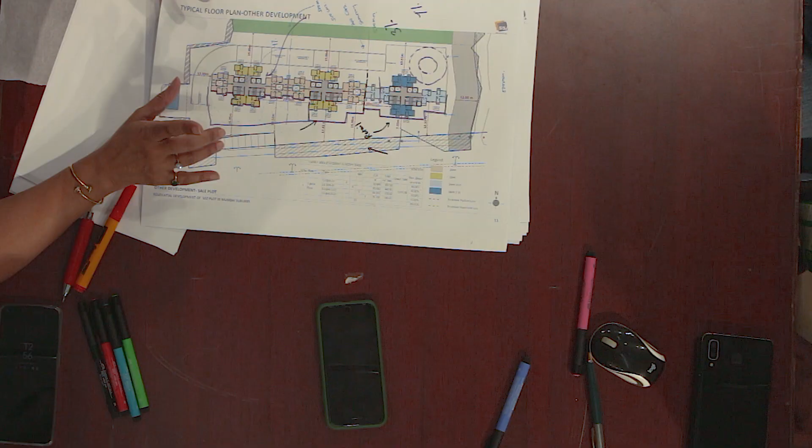So we had a quick meeting with the deadlines you have told us. With those deadlines, we had a discussion where we discussed exclusively what structural scheme we can go ahead with, and Girish has come up with brilliant schemes. So we'll discuss that today.

Sure. And Rohit also discussed all his MEP services, and I find that this fungible, which I had restricted to 1% and you told me I can go up to 2.5%, I may have to go up to 3%, but wherever it is possible, I'll try to restrict it. Try to limit it to 2.5 to the extent possible.

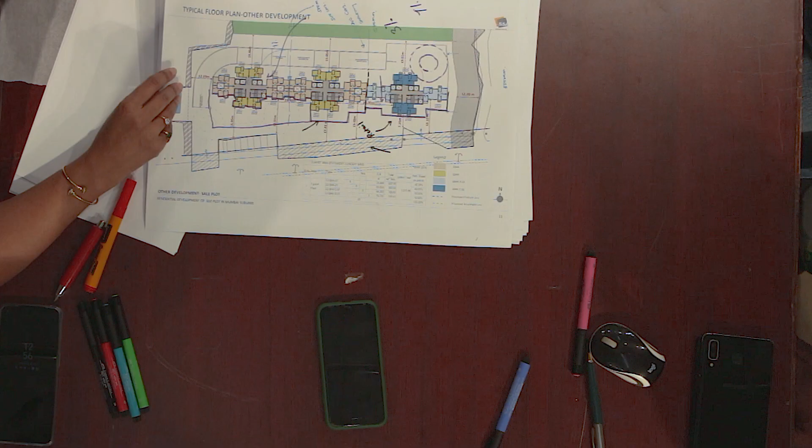Okay, again, we discussed extension of the podium, which you gave me as an option. So Girish again has a very good solution there. So let's understand from Girish and Rohit what exactly we are going to work with on the MEP and structural part of it, and let's conclude that today. Okay. So I'll start first because it deals with some tweaking in the master plan.

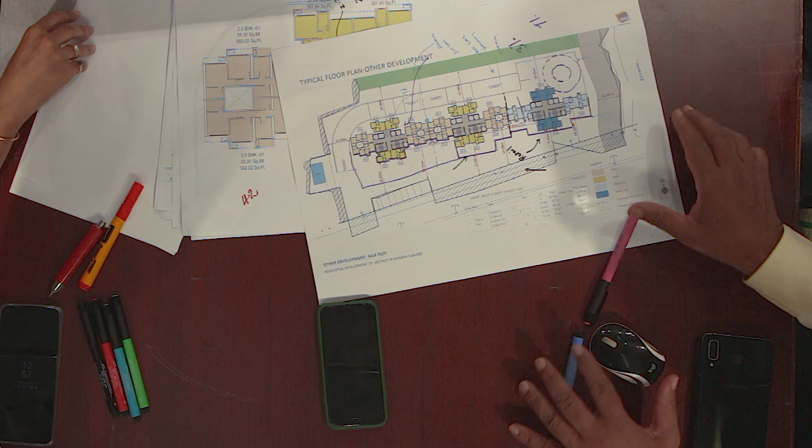I gave the values of the separation joints as 500 millimeters between two blocks, because they should not pound on each other in earthquake and wind. In the superstructure only. In fact, I had told the team last time that I would ensure I would not provide that joint in podium and basements, which I have succeeded in achieving. So the separation will start at the podium level.

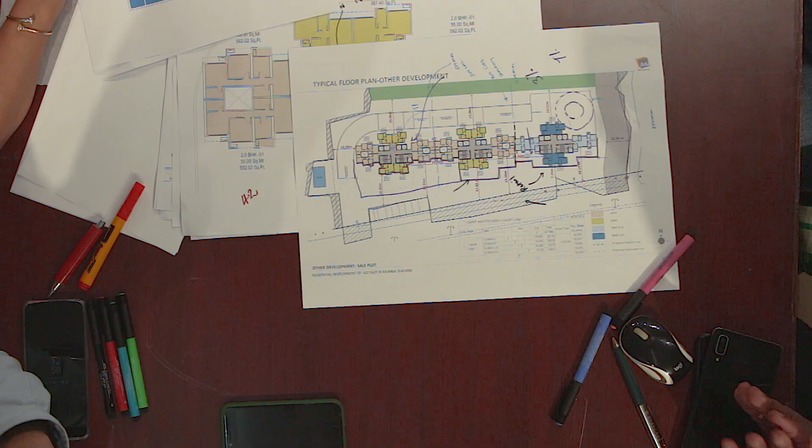Down below, these two neighboring walls will merge. So this wall thickness plus that wall thickness plus 500 will be a large pylon in the basements and podium that you have to account for. Of course, I'm not eating into any carpet area. It is anyway unusable area, but it will be a big pylon that you have to consider. As long as we are not taking the expansion joints into the substructure of the basements, we are fine. We are not even in the podium, so there is no issue of leakage from the topmost slab in any of the floors below. So that was the first point, which I think you are okay with.

Yeah, only thing is I have to look at the open spaces, and that survey is yet pending, where we are going with the stringent plot boundary. I thought by this meeting you would have done that, but anyway. Yogesh, I just need that superimposed survey on priority, by this weekend, because I need the confirmation. Once that is validated, I'll give you the validation that we can expand that by whatever distance.

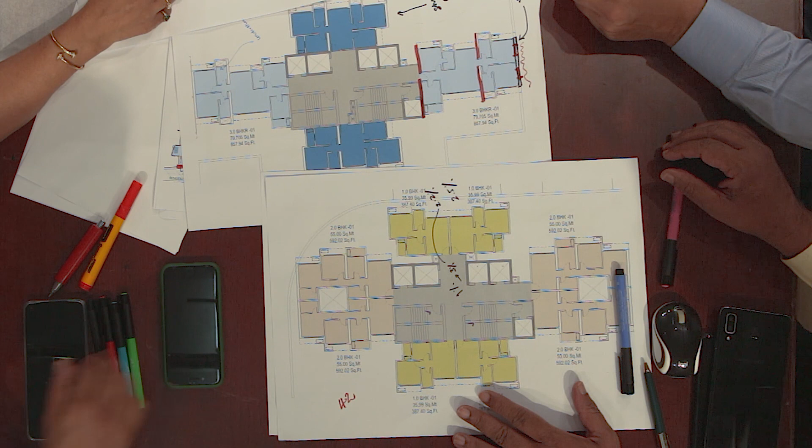Okay, now coming to the tower blocks, there are actually three buildings separated now with the separation joint, but the types are only two. This is one type which is repeated, and this is another block. That's the luxury tower on the eastern side. Absolutely. What I'm going to talk about for the structural system holds valid for this or that, so I'll discuss only this. We arrived at a conclusion last time that we will be taking this as the core wall.

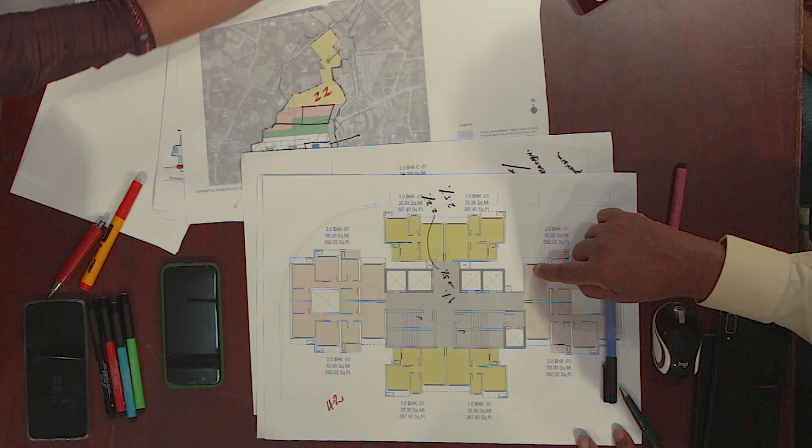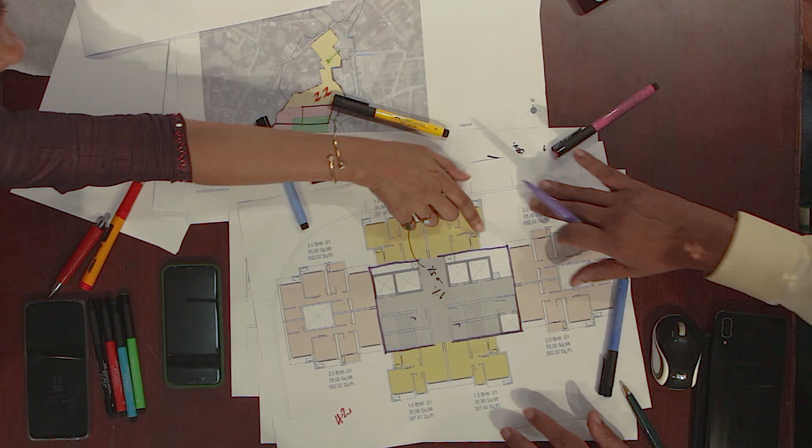Can I draw on this now? Yeah, you can. Just go ahead. So now our core is actually from here to there, and this will be our core, with whatever openings. I'm not restricting you from giving any openings in the shear walls. Here you will be linking it, right? Yeah, this portion will be a link beam. Also somewhere here could be. So whatever is in air is a beam.

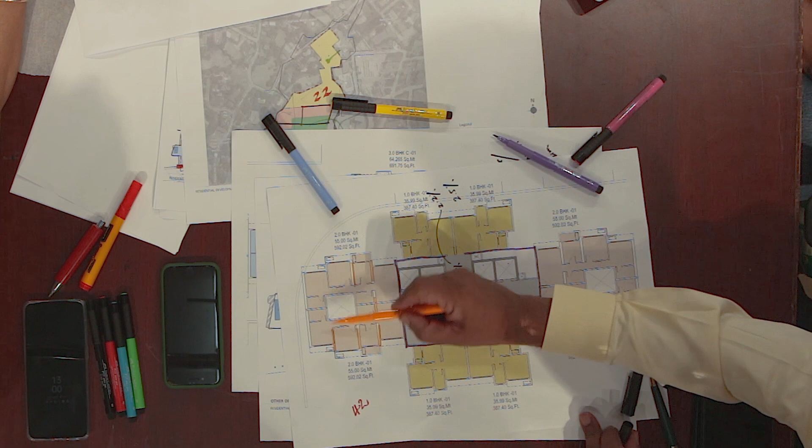Now there are two options I came up with, so I'll draw both options on the same plan. If I go with the dimensions of the core walls given by the architects in the first place, I will land up with a system having shear walls like this, which they have already considered in their planning. So I'm not doing anything new. I have avoided a shear wall here, so is it possible to avoid this shear wall? Not really, I will need that. Okay, I know you had done it, but I purposely drew it there.

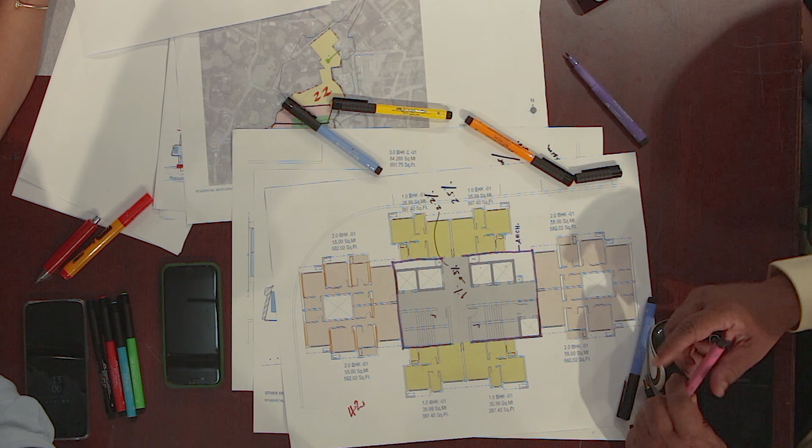And in another option, this is as per architecture dimensions. But if I slightly tweak the core by making this 450 millimeters thick, not changing any internal dimensions, I'll tell you how, I will make this 450, and these walls, this wall, this wall, this wall, I'll reduce, because I have increased by 150 here and 150 here.

300 I have increased, right? But I will maintain the external face. The footprint remains the same. I'll reduce 50, 50, 50, 50, 50 from here. So your overall internal dimension of the core remains the same. Right. Okay? So I'm not changing any external dimension.

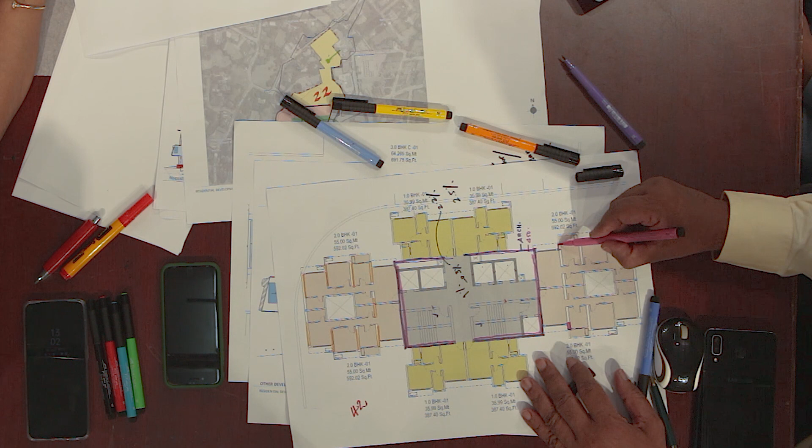Fine. Similarly, this wall can be made smaller, this wall can be made smaller. So this way also we'll manage. So I'm not changing any external dimension. But by making that a 450 thick wall, reducing the internal walls, I'm able to provide a system wherein I will have only flat columns on the perimeter.

You cannot orient them, but you can shift them here or there, whether you want the offset in the bedroom or outside, that you can decide. Outside offset will go into FSI. So I have to take it inside only. So you decide. But it's a perimeter frame only. And of course, I have to frame this slab edge as well. But then the rest, the entire area is beamless. It's a flat slab. I will have only the perimeter frame.

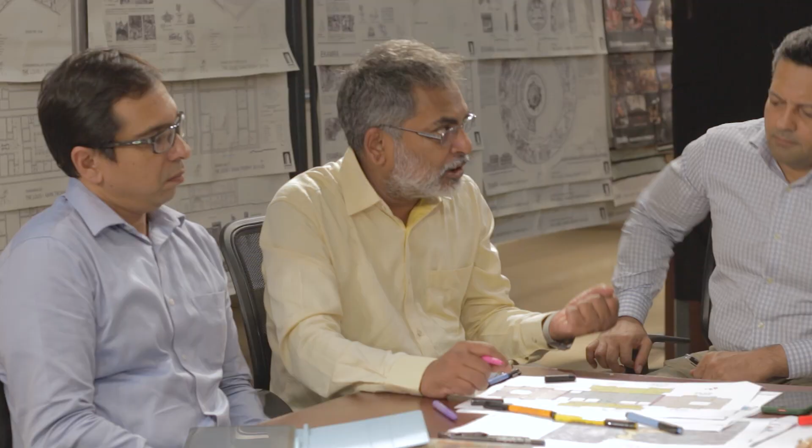Now, this solves one or two major problems. One is the flexibility of the interior layout, combining the flats, Jodi flats, even slight shifting of toilet areas, 300 mm, 400 mm. We are talking about having no sunk in any of the toilets. He's allowed us 25 mm for waterproofing. Underslung is okay with you? Yeah, underslung is perfect, no problem. So with this slight tweaking of the core, I'm able to give you a very nice flexible structural system.

This makes sense, except for a small addition. All the balance walls that we have, we would do in a non-structural concrete. That is a construction method that we'll discuss later. So that is the eventual intent. But you will need ledge walls, right? See, non-structural concrete, then you have to carefully consider what you're doing for ledge walls. Also, if you're doing a Jodi flat, then anything which is structural in nature will become difficult.

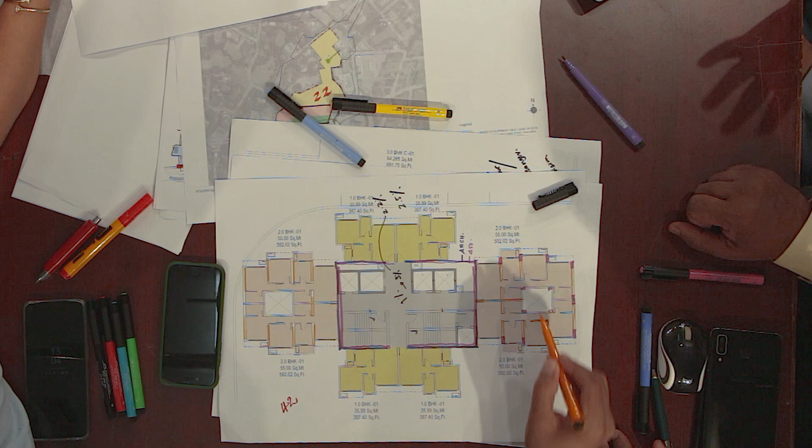See, Rohit, everything in orange here is a non-structural wall, so taking any of that away for a Jodi apartment... I understand your constructability, I'm just saying in terms of flexibility, especially in future, if you want to make any changes, because for all the WCs I need to convey the pipes out, I will then require ledge walls in all the toilets. Can we go with a notch? You can, but it's not 100%. Something that you will have issues with later. But I'm okay. I'm not saying no.

For him, it's easy because the whole thing just goes up and he'll avoid completely the brickwork, plastering, internal, external. If you look at these dead walls, they go all the way up to the 42nd floor. So no scaffolding on the outside face. Future waterproofing issues are resolved. I'm okay with it. I have no issues. But as long as we are aware of the limitations and what is required. Understood, yes.

And the ledge walls, whether they are going to be included in the RERA carpet area that you're considering? They are included, because RERA is going to talk about the MOFA carpet area. And that's why my question is, if we are thinking about the ledge wall, my toilet dimensions will go as per that. I recommend a minimum depth of 1250, which you have already considered. Yes, considering the ledge wall, I've given slightly healthier toilets, which was a little concerning for the smaller apartments. But when we come to finishing, that's the challenge we all face.

And are you okay with a single stack system? There will be no soil, waste and vent, there will be a single stack. It might allow Gautam flexibility on the facade, because if you say no for a VRF system and I have to put my outdoor units in each of these bathroom toilet shafts, then you might have some flexibility. But it's a more expensive system. You are aware of that.

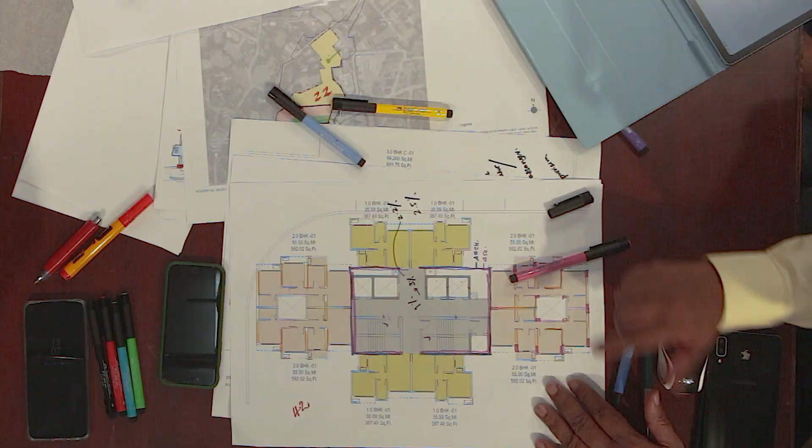Now, another decision we took, which is good for both Rohit and me, is shifting this space, which was discontinuing my diaphragm action. This was not connected to the core here, and incidentally, Rohit also wanted a shaft inside the core. So I have 320 cables going up to all those 40 floors. I don't want 320 cables. It's a fire hazard. It has to be a rising main. Yeah, we are fine with the rising main.

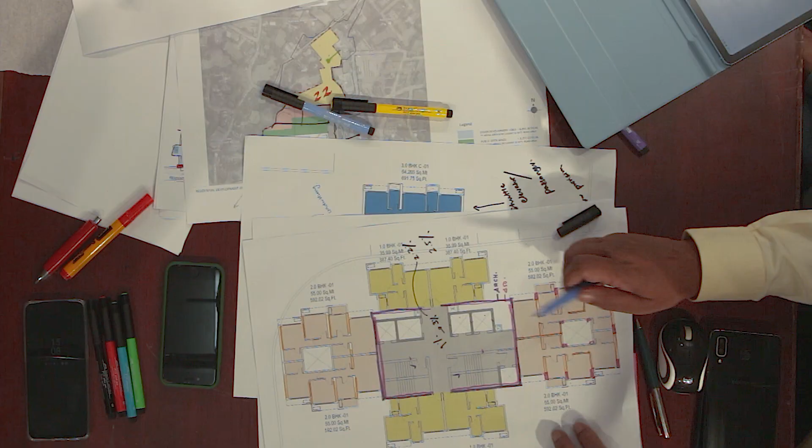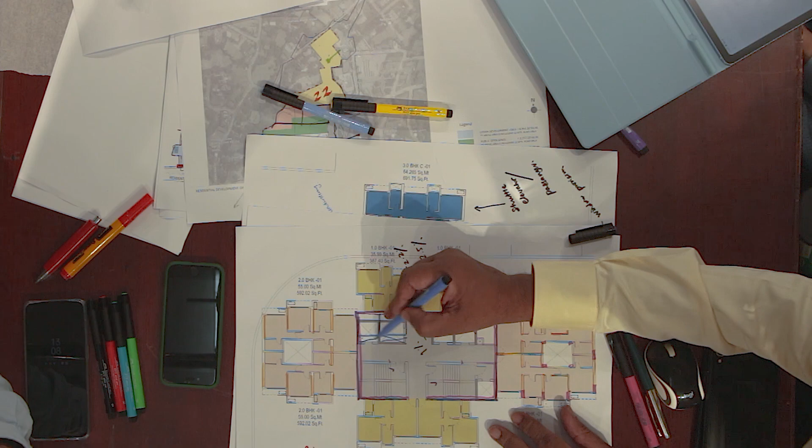So this gap we closed in the sense that we increased the core from this line to that line. So you push back the elevators basically to touch the apartment. That's right. So I get very firm connectivity of all the wings to the core, which is good for the structure, and he gets one shaft, which is here. This is the elevator bank, and this is the shaft. He is happy. I am happy. But you need the openings for the elevators. This is given. There are two elevators. Shaft is here. Only this much.

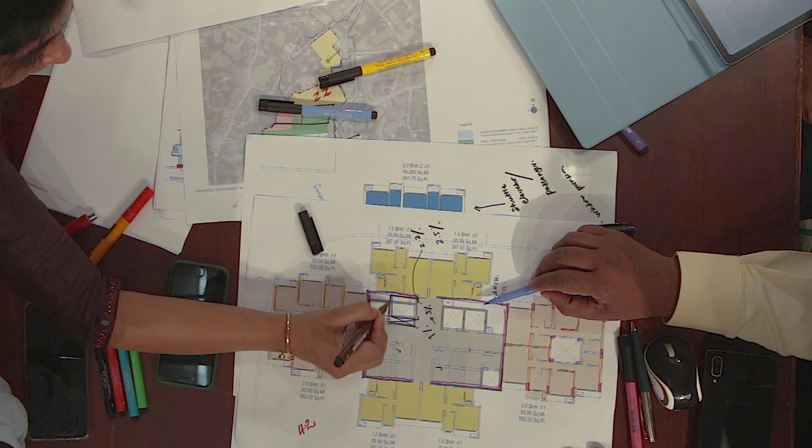See what is going to happen. This is the entry for the service elevator. So you get cut out on this side, and this passenger gets pushed behind, which has an opening from this side. So we are not closing anywhere. Fine. That's the other end.

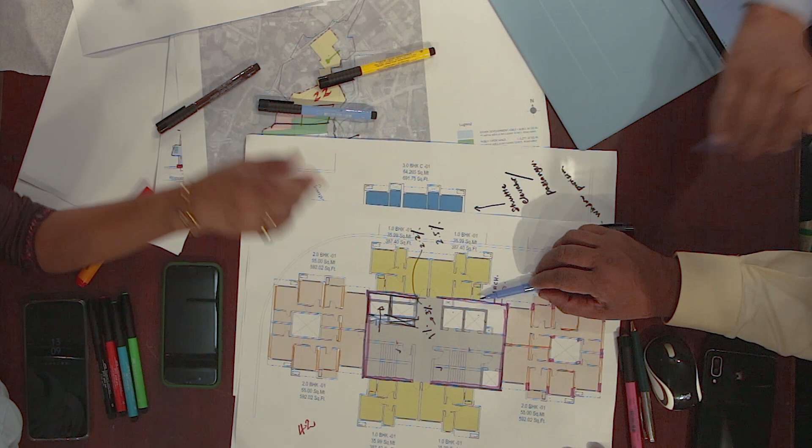Now, the comparative we need to establish is whatever I'm draining into fungible, as against your savings in the actual structural cost because of this core wall system, because a substantial fungible component he is going to lose, which is again a premium payment, which is a cost, which I'm supposed to restrict. But structurally, this joint is weaker, so that's where the comparative analysis can lead you to the conclusion.

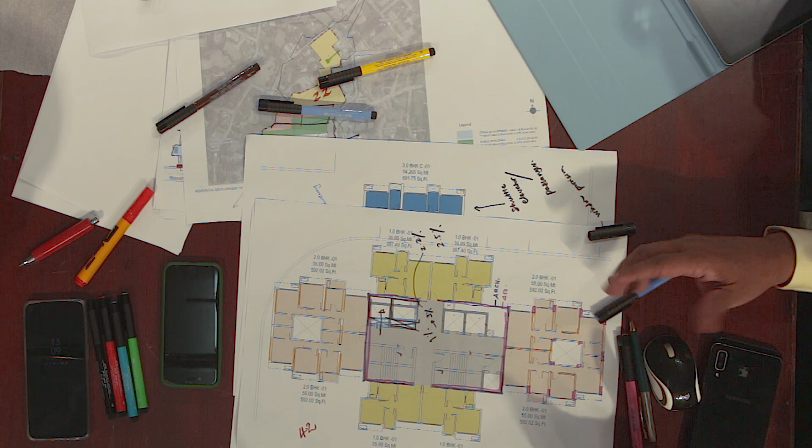The question that you asked last time, since Yogesh was not there, I didn't answer. But with this kind of system where I have a very nice closed spinal box and converting all the four wings into gravity systems, I'm reducing the steel consumption almost by 1.5 kg per square foot. Excellent. So that is a guarantee from my side. So this will be very economical and very constructible, very easy to construct.

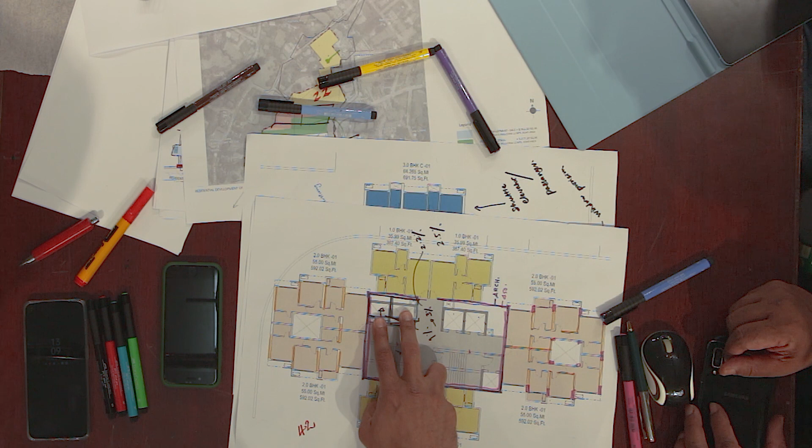So if we are doing it for these two elevators, can we do the same thing for these as well? Yeah, it has been done. It's a mirror image. Then I'm going to drain a good amount of fungible into this particular strip, which would lead to some percent, which I have to work out. Fine. Then I get another additional shaft over here, I guess. It could be a linear. Rohit, my concern there is that the opening has to be 1 square meter, which is a statutory requirement, and then I probably have to shift this whole tower footprint.

Eventually, what I asked about the fresh survey, there is a flexibility which I can see. We'll see that. If you give me that, it validates my 1250 by 750 fire shaft, my ELV shaft, what you have made provision for, you are going to accommodate for me. Yeah, and then I'll see that, because of the expansion joint and open space crunch, if I'm increasing the length as against the fungible impact, this cohesively gives me how much I can shift the tower or elongate it.

We are doing a high pressure, low pressure zone for fire also. Okay. So that is going to increase the size of the shaft, sure, but it is going to be easily manageable pressures. So it will be better for us. So I think that's all from my structure point of view.

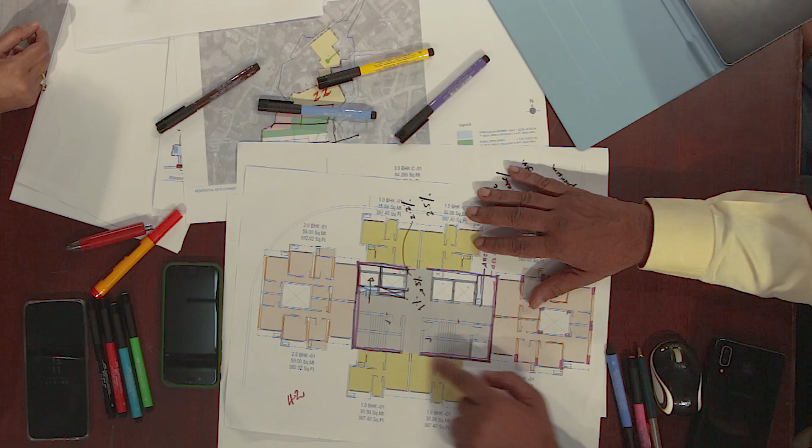Next thing, if you are approving this flat slab construction, at this point of time it seems the perfect solution. Yeah. So flat slab system and underslung plumbing systems is fine. And single stack. Single stack. So because I don't want to do rework, I'll take it that flat slab is the preferred option. And then I will give you the column sizes, considering this as a 450 thick core wall. Okay, so that's the next step I'm going to do.

I have proposed podium, which he has already given me okay. Right. I was thinking about a fourth basement, but he was also of the opinion that he doesn't want to go for a fourth basement. And looking at the strata, I don't know whether it's a feasible solution to go for a fourth basement. See, already with 3 basements, there is going to be a big cost on shoring. Yes. The strata for the first 6 meters is very soft soil. Although after that we are getting good weathered rock and hard rock. By the time we reach the third basement, we are founding on hard rock, no doubt.

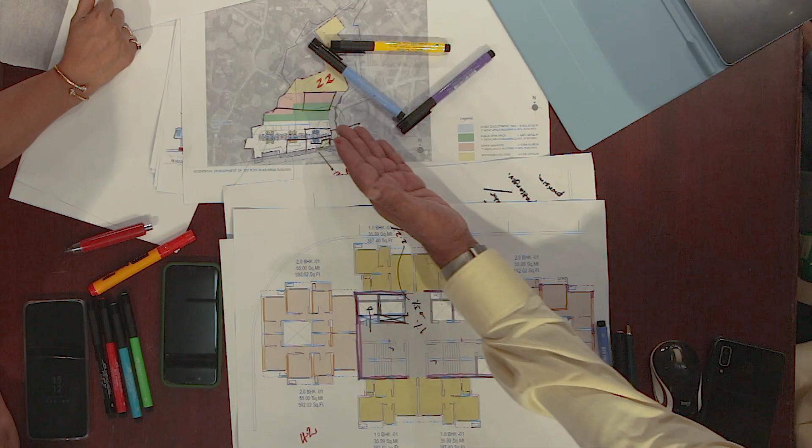But the top 6 meters of soft soil has to be retained, for which, looking at the area where there are a lot of drains and marshy soil and all that, I am suggesting secant piles interlocking into each other as the shoring system. So that's the cost. So if you go for another basement, the cost will increase tremendously. As you go deeper, the cost will increase in multiples. Exponentially. Substantially.

Just 2 more things that we didn't discuss in the last meeting. All the elevator shafts have to be pressurized because it is high rise. True. And both the staircases are also non-ventilated to outside. They will also require to be. One of them will be ventilated outside because that's an NBC need. But let's provide for pressurization of both the staircases. Yeah. Okay. So that I will be providing.

And what you mentioned to me about the 2.5% natural ventilation of the basement. Natural ventilation of each basement has to be 2.5% of the floor area. So for the lowermost it will be 7.5%. Yeah. That's the biggest challenge for me, actually. Correct.

But talking of basements, see, I finished my typical floor plan. In the basements, I need your inputs in terms of locations of STP, UG water tank, DG and transformers, all that. The loadings. Yeah, I'll need the loads. I'll give you the static and dynamic loads for the DG. And from you I will need static loads for all the other devices. Right.

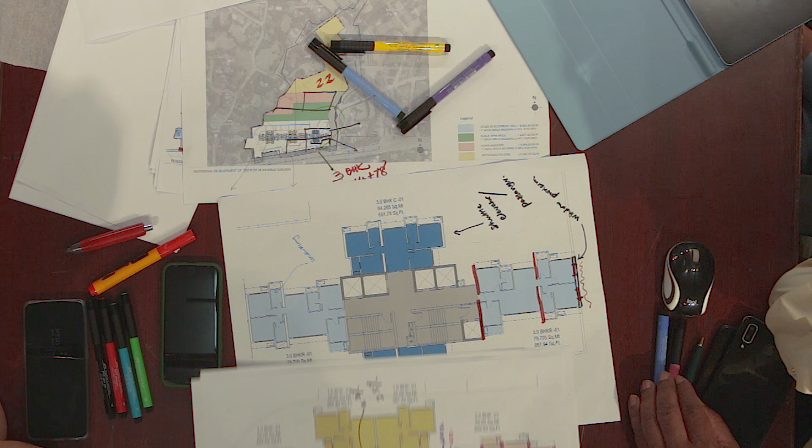Both the ends, especially this is the premium tower and it has views. So if we can get some window openings in both the bedrooms. I have no issue. The proposed structure is flat slab with columns. I have only columns, 3 columns on that face. So in between you can have any openings. It's no more shear wall any which way.

I need to bounce, so we need to speed up this thing. Sure. If we can go to facade, right? Yeah, fine. All right. Let's start.

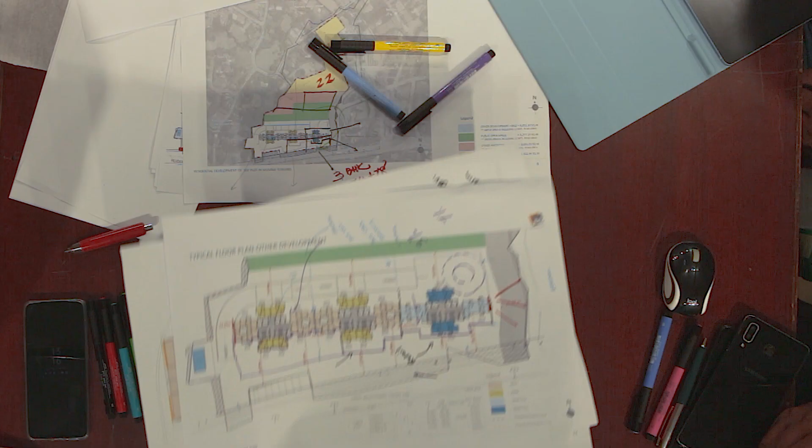So Gautam, I've sent you all the images I have developed. I showed it to him also. He had his comments. Overall, the massing looks okay to him. For the crown, he has suggested some additions. There are two typologies if you look at it: smaller apartments and larger apartments. So in that case, I was thinking about having two schemes, one with a unitized system and one with a window wall system.

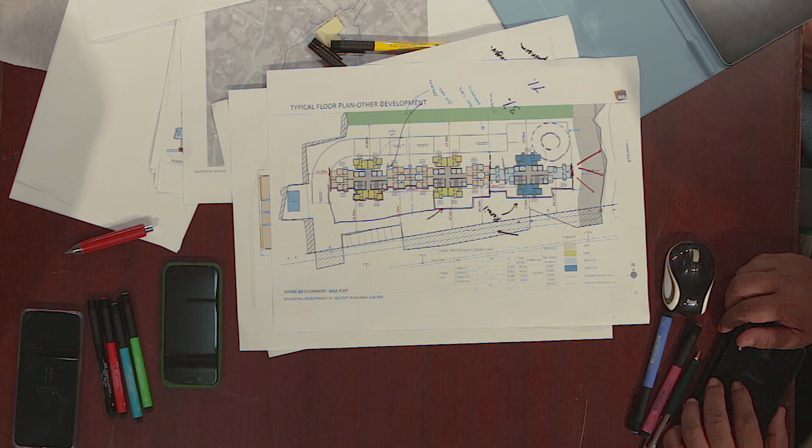I am of the opinion that for high rises the chhajjas are important, but at the same time I don't want to restrict myself, since for high rises ease of construction and all those elements come into the picture. The third aspect of this facade is having outdoor units. If we are not locating them in the shafts, how are we servicing them? Installing is okay today, but tomorrow how are we going to maintain them?

And at eye level, I need at least a railing, something incorporated in your design that allows my technician to wear a harness, hook himself, and then go out. Yeah, and normally your chhajjas would be about 600 lower than your floor level. So even descending down to that area, you'll need some kind of monkey bars and to be able to restrain yourself.

See, right now the structural scheme he has given me is with the flat slab. If he is approving, it's a 200 mm slab thickness, and then there is a drop of 550. So the chhajja is going to come out at the 550 level, and then I'm going to fix my window. The lower portion will be fixed and sliding on the top, or a complete unitized system. But for the smaller apartments, I have to go with chhajja because outdoor units are going to come. The kitchen is not sufficient to have all outdoor units there, so I have to think.

Unless you do a VRF system. But right now, if I have to go for 1 BHK with VRF, I need 1.2, and that is going to be unaffordable and jeopardize sellability. No, you don't need 1.2 unit sizes. There are front discharge VRV and VRF systems now where the depth is only 450. Oh, is it? But length? Length is also not that much, 1.2. You can get a top discharge machine as well. A VRF would not fit the bill.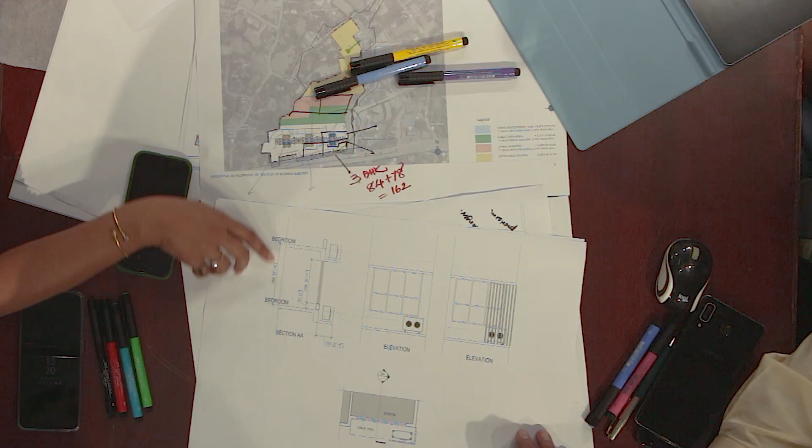So in that case, we have worked out even the window wall sections over here. Right now the beam depth is slightly larger, but with the flat slab it is going to slightly change. So something like this is going to happen if we are providing them into the kitchen or over the chhajja. So this is what would fit into the budget, because you will also do the wind tunnel analysis structurally, as well as from the facade perspective, comfort and all these perspectives. So what would be your recommendation in this case?

So I think window wall is okay to go with, and it's also friendly from the perspective that you can generate chhajjas out of your structural edge, and then all of your outdoor units can sit there. They can be screened quite easily. The temptation to put a curtain wall on the outside will make these things disappear, so that's one thing we'll have to be careful about. Not only that, on every floor you will end up having a fire curtain and a sprinkler system all around, which is not desirable. And curtain wall will always increase the expense because you're covering your entire front face rather than only limiting yourself to here.

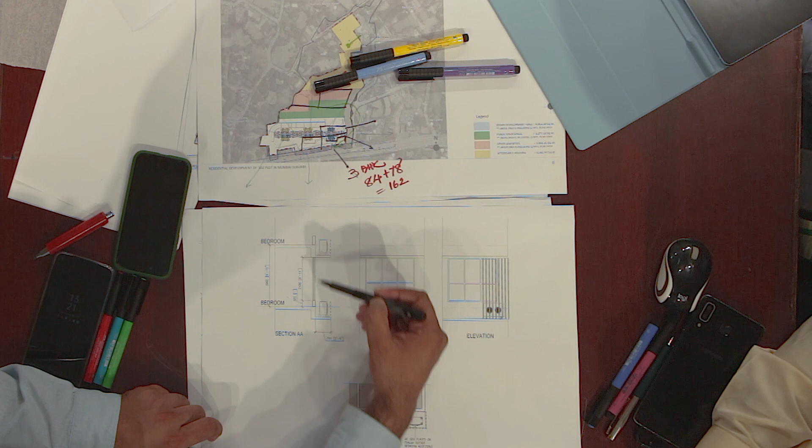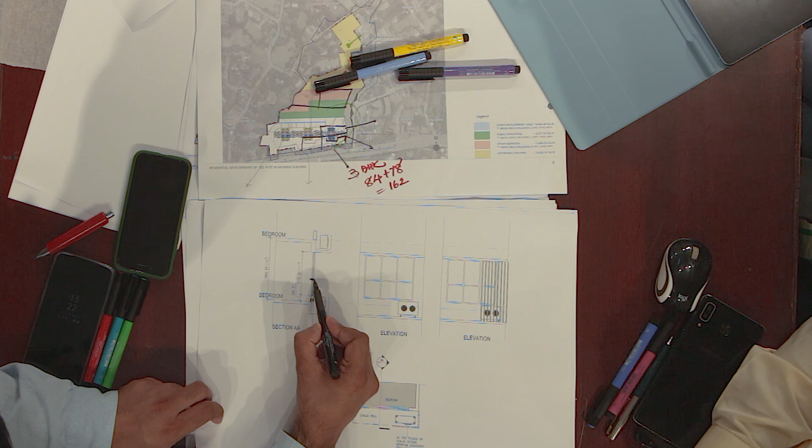What we also recommend is that from the inside out, the experience should not be different between a curtain wall and a window wall. So we would just provide a small threshold here and then take your window down all the way. And from a barrier perspective, that largely depends on the kind of wind loads we have on the building. If the wind loads govern any other loads, then the glass itself will become a barrier. But if not, then we will provide a barrier that sits at 1.2 meter level, which will also allow us to generate window opening opportunities above.

So are we going for wind tunnel analysis for this? Yeah, we should. Given the height, it will be advisable, because of the kind of slenderness we are talking about. It's a very long building; we have a very long face. For our environmental clearance also, it will be required. We have no choice. Yeah, that's right, we will need it for MOEF. It'll help us optimize the building better as well, rather than just going with a conservative approach.

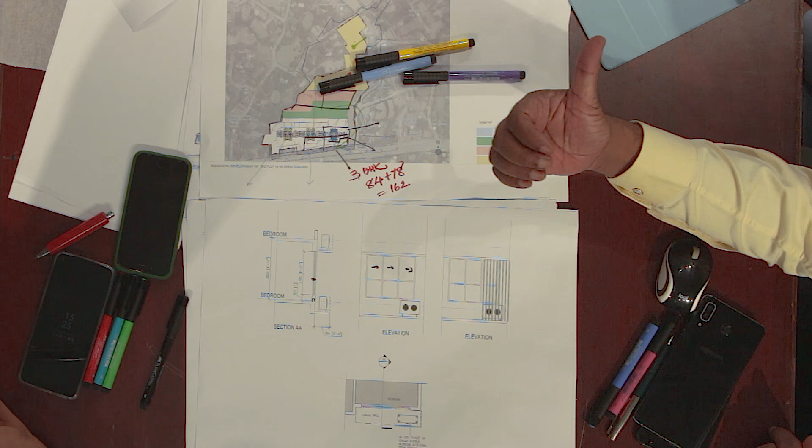People always think that if the long face is facing east and west, there is more wind. Actually, it's not that. The length of the building is along east and west. Although the majority of wind is going to blow from the west, there is something called the crosswind effect. If the wind is blowing along the long face of the building, there is a flutter across the direction of the wind, and that is what is going to govern in this building. So although wind is going this way, the building is going to actually sway in the north and south direction. So it's very important that we go for wind tunnel. It may cost about 20-25 lakhs, but it's worth it. And for window design also, you need those. Absolutely, we definitely should.

I think another factor is that because of the offsets we have here, there are a lot of corners that get generated, and corners tend to have higher wind pressure because of turbulence, and then a vortex detachment that happens closer to the end. So I think we'll get a better understanding if there are some critical hotspots happening on the building. That's right.

But can we think about some sort of a scheme where I can make this tower feel exclusive? And what could be that? From a visibility point of view and also from a marketing point of view, I think there are ways where you can add elements to it. So from inside out, you're still not changing the experience, but you could perhaps have bits of glass.

So if I were to sort of translate that onto a layout, wherever you have your master bedrooms, and again, it depends on structural feasibility as well, you could perhaps just wrap this around the corner and give them a nice corner window here, and this could be entirely a curtain wall glazing that runs up the building. Okay, so for this tower, is it possible for us to create that kind of a corner window in the given structural scheme right now?

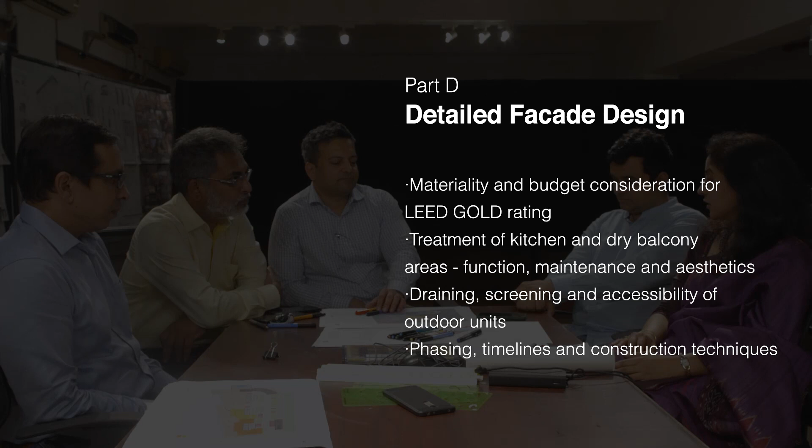Okay, Gautam, I think facade we left somewhere and a few things are not yet resolved. So can we take all those elements which we didn't discuss last time? Yeah, largely it's about your FSI line versus your carpet line. We are generally in alignment with what's required, but we'll have to go into a little more engineering after we get the wind tunnel test results to see exactly what the system depth needs to be, glass thicknesses, build-ups, etc. We are also talking about getting LEED Gold, which will have a good bearing on the overall daylighting.

There have been some conversations with Rohit's team that we need to look at a DGU with certain performance parameters that they've already provided to us. We'll go to the market and see what kind of products we can get. We've already discussed operable strategies. We've had discussions about your outdoor units, access to them and how we screen them. There are some outline costs established which we've already passed to Yogesh to understand where we stand on our budgets.

So in terms of design we have a clear directive. All the big points have been communicated to all the key stakeholders. Given that we are planning to break ground soon, we will have to talk about certain constructability issues which will also come into the program.

And I think some elements on the facade will need to get built in right now. I have one thing that I am looking at, some element for the kitchen dry balconies, because somehow I feel that the glass railing doesn't serve the purpose required in the kitchen, and it's a pretty messy area and it's absolutely used as a utility area.

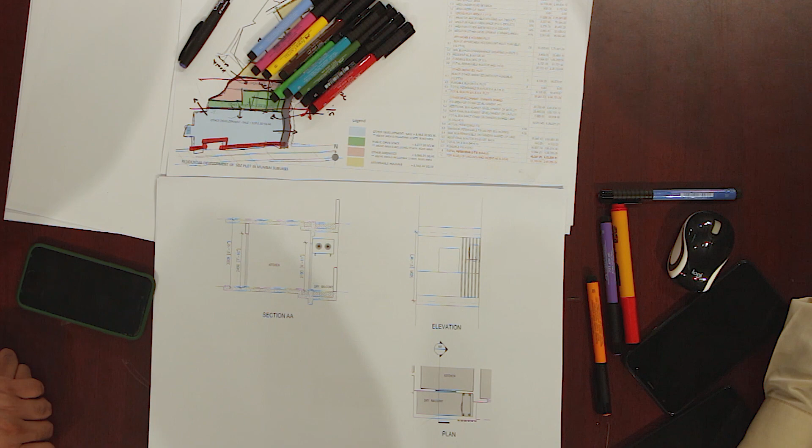So I'm definitely looking at some good solutions for proper shading, and then there is cloth drying, and that's the reality of the compact apartment. That's where I need a good solution where from the maintenance perspective we can think about some sort of a jali or metal panels, perforated sheets or something like that, which is camouflaging that kitchen dry balcony and becomes an integral part of my design element. And that's where I'm coming from.

I mean, everywhere glass railing or glass windows is not the criteria, but giving the solution desired for the purpose is very important. So do you have any suggestions right now, or do you want to look into which options you could give me? Yeah, I think there are already some screening elements you will have on your chhajjas for screening your VRV units, or your outdoor units rather. A similar approach could be adapted for your dry balconies as well.

Essentially, you have a washing machine there, you'll have at least one outdoor unit there, some piping going down, and like you said, people use the balance space for drying clothes and other things. So I think it will be ideal if we screen the entire thing, either with extruded profiles as a screen, or it could be perforated. We could look at different options there, including finishes, and what kind of architectural impact it has on your design.

Okay, and Yogesh, I have one suggestion: discuss with your marketing team if this dry balcony could become a part of the kitchen, then it could be just a partial opening, and it is a much cleaner and neater space. Typically, let Rohit also weigh in on that. You want the dry balcony to be slightly sunken because you have a washing machine over there. Even for AC servicing you need a drain outlet over there, so it needs to be sunken from your kitchen floor.

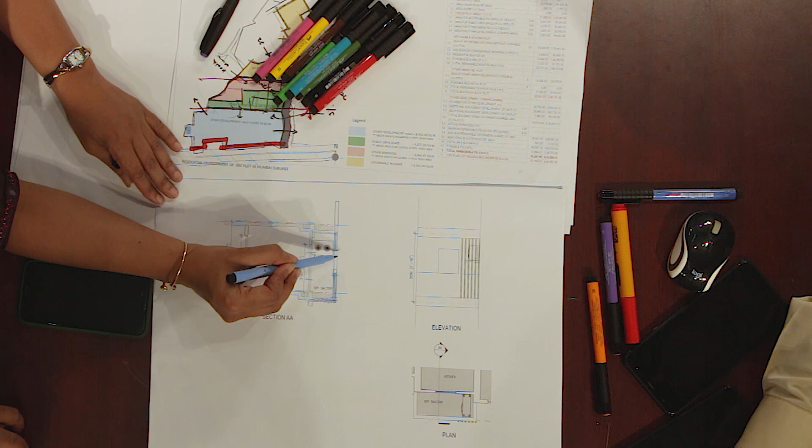But this could be a nice niche sort of a thing, and then I have some sort of a jali detail or something like that, and this remains as an opening. But you have more sturdy and solid elements, and aesthetically I'm just adding a few panels to it. You mean not a railing? Not a railing. Rather, this has to be solid in that case. So it will be a structural element which he would build into his design. Right. More like a parapet wall.

So basically what we are talking about is I can knock off this wall, and this itself goes from the lower floor to here, with the platform continuing like this. Correct. So the platform ends and not a wall. I knocked that out. I have a kitchen sink and wash basin, and this further gets extended. So that could be an option for the smaller apartment, which will substantially save cost, and the detail from the maintenance perspective could be much better.

You may have to look at the scenario where our columns have to remain in this line because of the building profile. Correct? Absolutely. And because my system is flat slab, I will need a beam connecting the columns. Right. So while you are opening up into the dry balcony, you will still see those offsets of the beams and columns, which you will have to take care of. Right. This is fine. We can look at it.

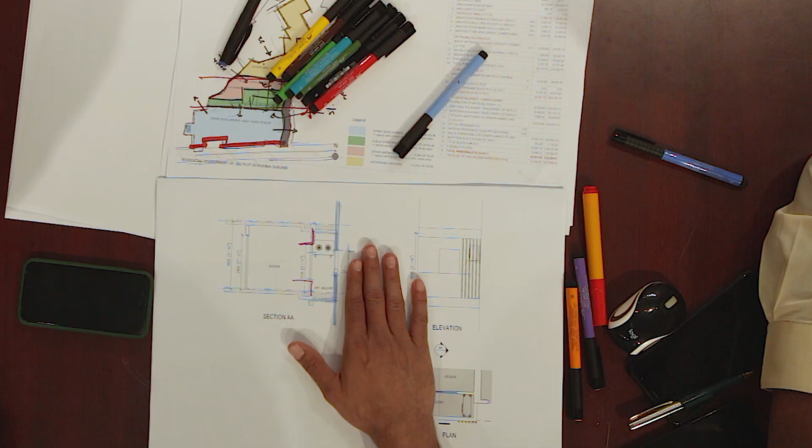So if you can develop a few options on it, and then let Gautam specify the opening that he requires, both from a visual aesthetic perspective from the outside as well as for the ventilation of the outdoor unit.

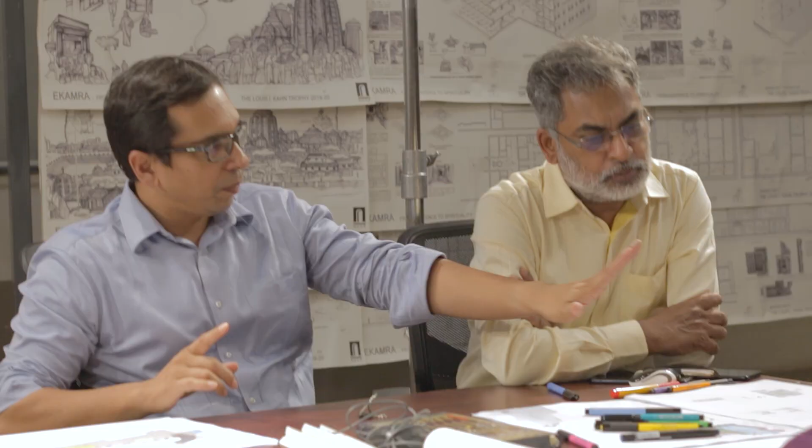Right. If you are going for a non-VRF system, remember the outdoor units have to be pretty close to the indoor unit. So if it is in the living room, then my indoor unit will be above the living room window, and we provide a sleeve and come out. So you will end up having that kind of camouflaging on that side also. We can't get that clean, clear glass elevation. Please keep that in mind. I mean, that's something that is unavoidable.

And then the exterior facade cost is going to be substantial when we think about UPVC. Here rather it reduces, Anuja. Yeah, like you said, here rather it reduces. And if it's broken, it would look much better for a residential purpose rather than looking like a pure commercial building with the glass envelope. Yeah, agreed. But Yogesh, right now what he is pointing out, I have considered a few which are slightly away from the indoor units, and then performance becomes an issue.

See, for me, I need to drain my indoor units. So I need a condensate drain which is insulated. So then I'll end up having to put an additional drain outside if I don't have a shaft close by. And if you're taking it far away, then my copper piping has to go concealed, or you'll have to put a false ceiling, which is again going to be a cost to you. So just consider all these things. I feel that we should take it as close to the outdoor unit as possible while providing an additional condensate drain separately. But we combine 2 or 3 units as much as possible.

Correct. So looking at all these elements and LEED Gold, what should I look at as a cost per square feet for facade? And not only that, later on, even from the management of construction and from the maintenance perspective, what is going to happen? That's something which I wanted to understand. So, from a LEED Gold costing perspective, I think if we are trying to really place this building at the more premium end of the market, then the kind of products you will end up putting there will automatically qualify or get you close to LEED Gold.

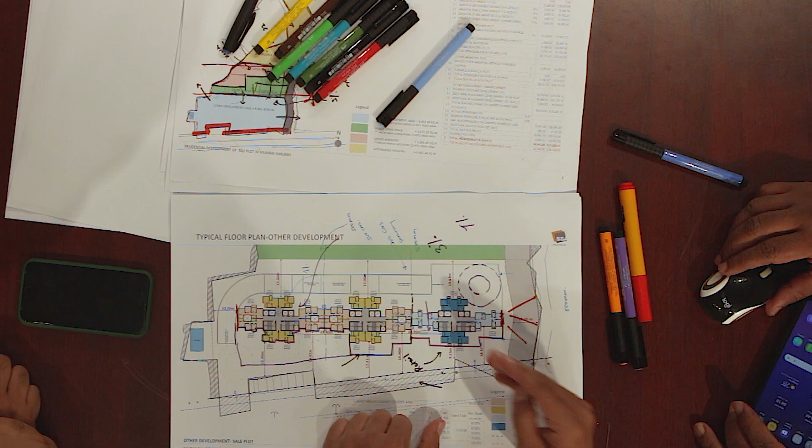Another thing I wanted to discuss with you guys is what are our timelines? Yeah, we'll come to that. So, looking at the structure itself, it's going to be in an aluminum formwork system. Perfect. So, like we discussed Girish last time, all internal walls, though they are non-structural, will be cast in concrete in a single go. So that is something that we'll have to account for.

You might have to give dimensions that are easy to pour, not less than 100 or 110 mm, but they satisfy my requirement as well. The minimum depth of electrical back boxes is 40 mm. So if it is a bedroom which is back to back, then I have to offset the switch boxes, so you'll have to take care of that. So 100 is good enough, right? 100 should be good enough.

You had a point about Reckli to be introduced somewhere, right? Yeah, but right now if we are opening with the corner windows, there is very little area left for the Reckli. Still, it would give me a good finish and it looks a little more innovative and nice. I can go with the patterns.

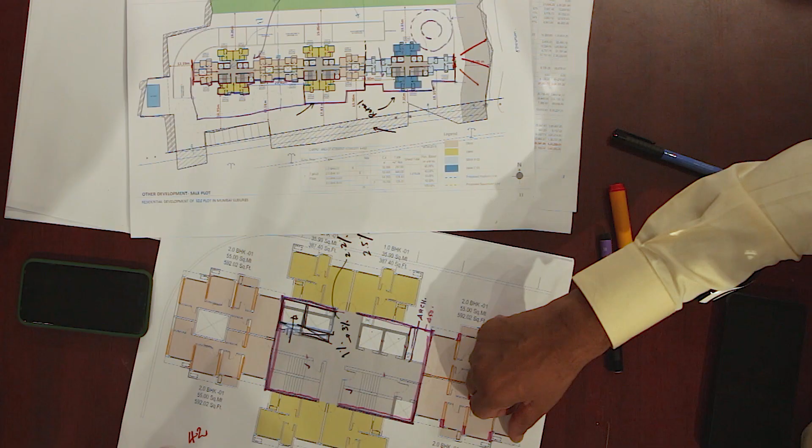So from a Reckli perspective, I think one of your schemes doesn't really work well because where you're trying to do these pink areas is structural and the orange is non-structural. Reckli would ideally be just one surface where you have form liners on the entire formwork. So this will be an entire structural wall, a shear wall, like I said. It would be a single wall, end to end. Yeah.

The only thing I was requesting is if we could get some openings in this. Sure, right, we can. But we are thinking about the corner window. So now if the window surface is already increased, then probably you don't need it. I don't think that corner window leg would be more than 450. I don't think Girish would give anything more than that. But in that case, the window detailing will be a big trouble. Yeah, the corner section we can discuss.

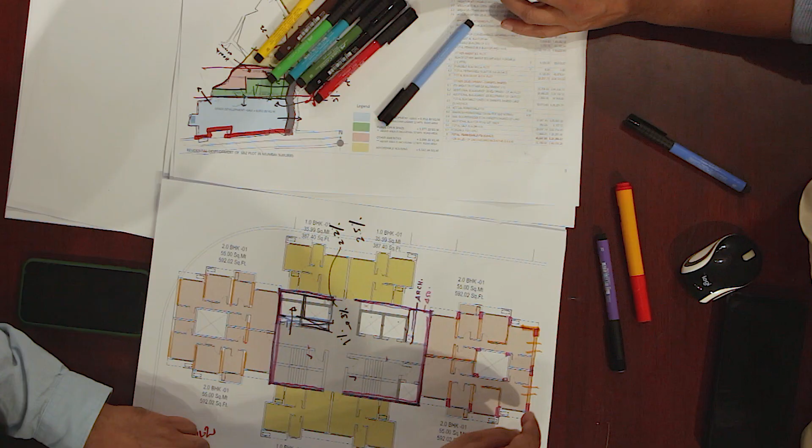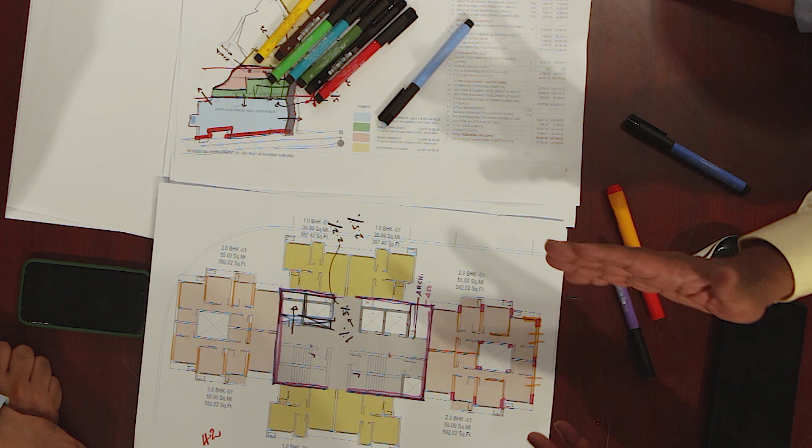Because I think one option is to have 3 columns, the other one is to have a full shear wall. We could probably reduce it a little more. It's a fabulous element if it can be introduced, in terms of elevation treatment. As I said, this is not a lateral load system, so let's not worry about that. This is a gravity system. So as long as I get the cross-sectional area of these 3 columns together at one place, I'm happy. Wonderful, great.

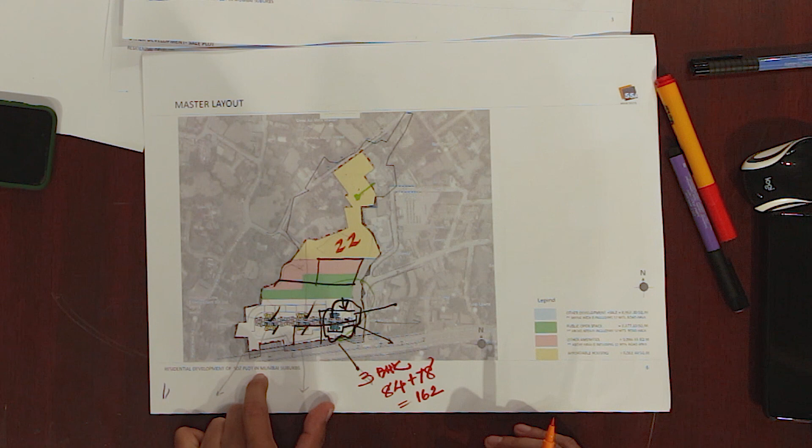So Yogesh, your overview of management of this whole project, because there are pretty challenges. Yeah, so like I said, to start with, we don't want to go deeper than 3 basements. Last time we had a discussion. Shore piling costs will increase, I mean, exponentially. So excavation is limited to 3 basements. We are getting a good founding substrate at the 3rd basement itself. You talked about the phase wise. So how do you want to phase it out, with the fire engine access and your CCs and your IODs in place?

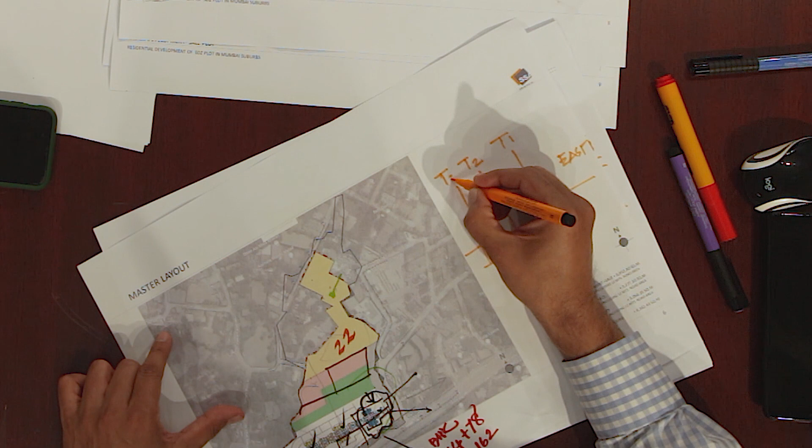So we want to open up with Tower 1, which is on the east side, which is the premium tower, and T2 and T3 will follow based on the sales velocity. So it's not really long-term phasing. One follows the other. And the podium will be completed in any case. So that solves your problem. But you have a repetition over here. Still, you want to start with this tower first? We want to start with Tower 1 first based on the sales inputs. That worries me because if he gets the better velocity, he might come back and tell us to go with the luxury towers. We might do that. Tower 2 and 3 might get converted to the luxury tower concept based on your traction.

Chalo. I think they are asking us to vacate the conference room. So can we finish up? Even I have to leave. Can we finish up?

Anyone else, if you have anything? If not, we have to move to GFCs. We are almost on the verge of getting the contractor finalized. So cast in situ walls. Walls will be cast in situ, so there's no block work, gypsum plastering. That all is avoided. We will go with simple punning of the walls. What about facade fixing? Will you want cast-in channels in the slab? I would prefer cast-in channels if we are going with a curtain wall. But if it's largely a window wall, we can just do anchors. But with flat slab, are we considering any post-tensioning? No post-tensioning in the towers.

Yogesh, you need to finalize the Revit coordinator, because as we are closing the concept, we will move on to a schematic BIM 3D model. I suggest and propose that the architects should hold the overall model, put it on a server, and we'll keep accessing, modify it, and put back the structural and MEP modifications. We will do it from our end, but in the same server. Appoint a coordinator from your side who we can talk to. The architect owns the model and the other consultants add on to it for their respective trades. Agreed. Works fine. So by end of this week, can we at least have a schedule from you as to when the GFCs can start rolling? Certainly, yes. Please update your DBRs.